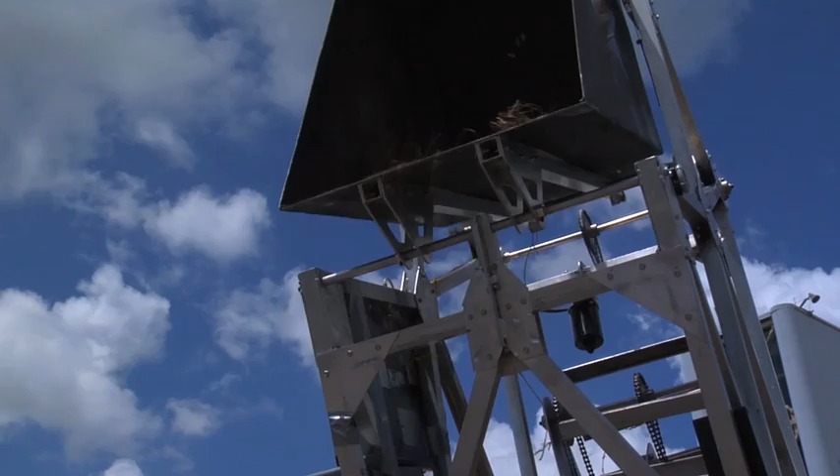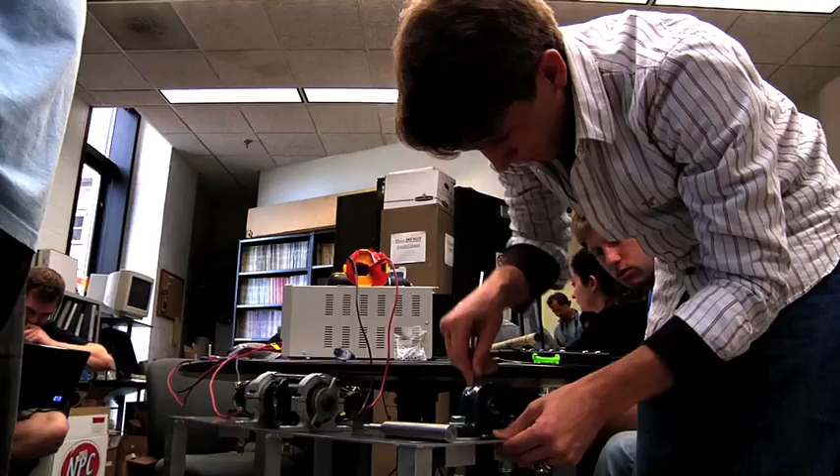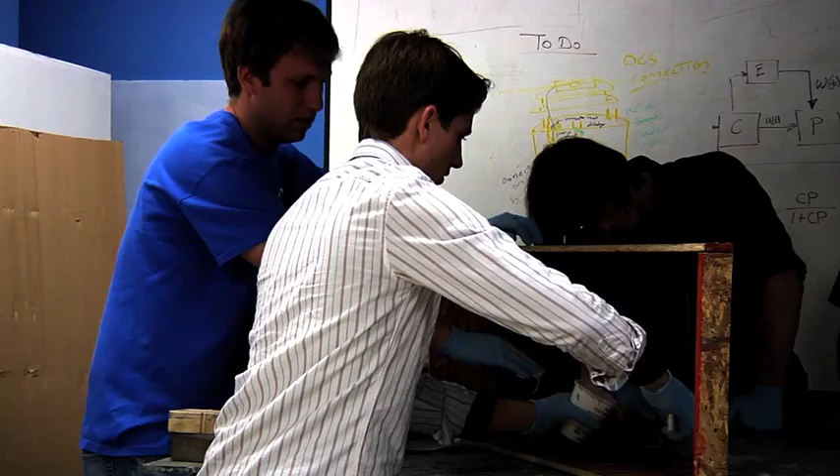As seniors, we have to do a senior design project. And as soon as we saw NASA, we thought this seems pretty interesting. It's a hands-on project, using all of the things that you've learned in the past 4 years. I think when students are challenged, they do a lot more work and have a lot more fun, and they can see that they're producing something.

In the engineering field, it's never a one-person job. You have to come together and build something. It's kind of taken me out of my comfort zone, making me learn things I wouldn't normally have to do. What I actually did in this project is take on electronics. I don't really have much electronics background, so he really made me learn a lot and try to do what I can. We're pretty far behind, got a couple more weeks to get this whole robot complete, so a lot of late nights are coming up.

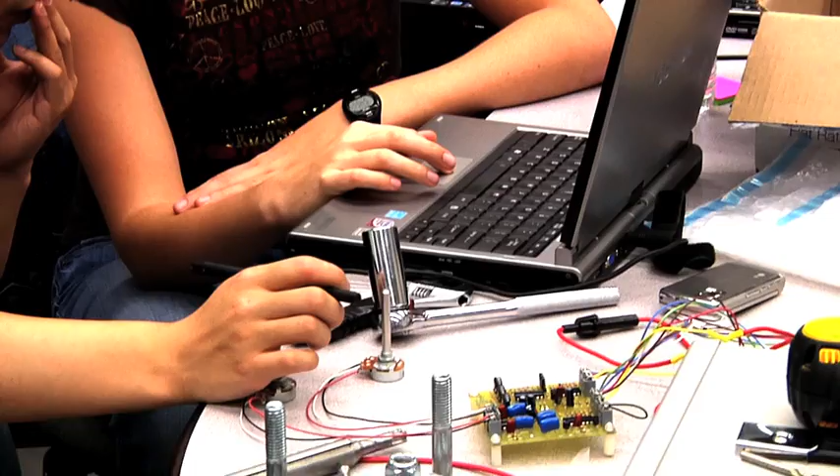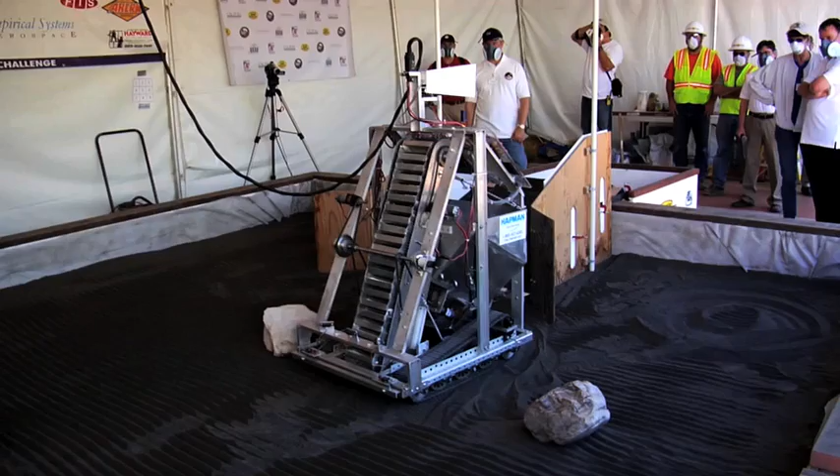We've been really focusing on the whole design process. It started with, what kind of qualities do we need in this robot? How fast can it move? How much can it hold? Are we using a joystick anymore? Could we just turn the motor off and on? We started off by looking at previous competitions to get a feel for what people were doing.

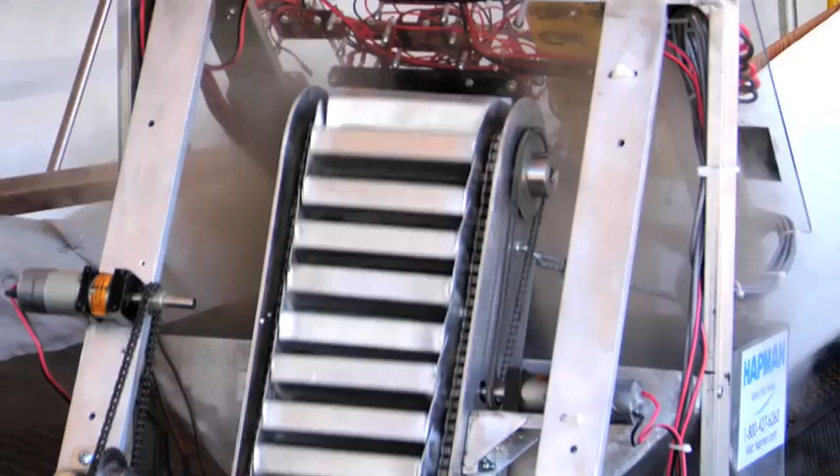We originally saw the bucket chain design, and that was sort of like the favorite, it seemed like. The bucket chain - they're a hassle, and it's a good way to lose most of the material you excavate because it just falls off. We felt like that was just copycatting, not really being innovative like NASA wants us to be with the competition. We went through a lot of different iterations, but we eventually came up with the auger.

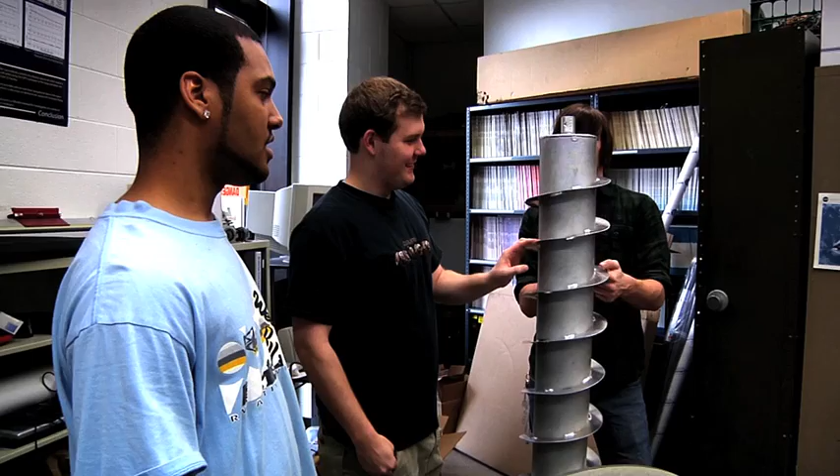It'll just drill and hopefully bring up dirt. It's a little wobbly, yes, but I think it's just going to force itself up. A lot of people tried to use augers in the past and didn't really get too much success.

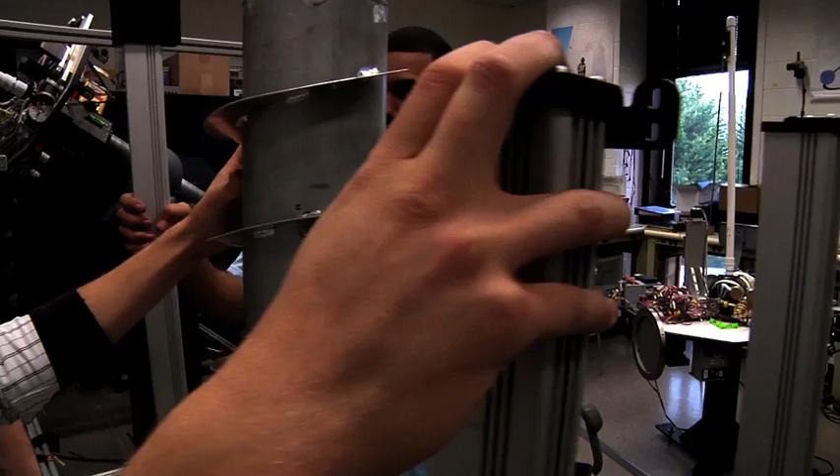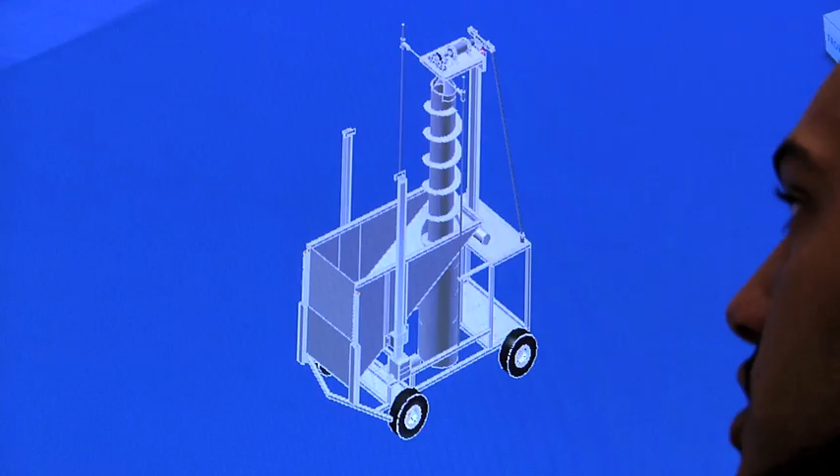You may need something on the frame to hold it up here. A lot of times I'll try to point out some obvious things to them, but you know, it's their design. So basically, this is our starting position. Once we're in the digging area, we'll stop, and then we'll lower the auger. The auger's all the way down. It's been spinning, and the dirt's been pulled up into the bucket.

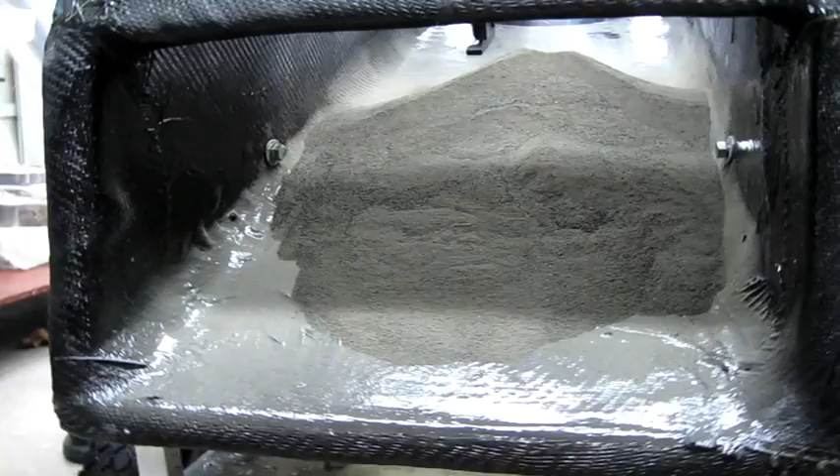That mold right there, that's going to be the outside, then we're going to put the carbon fiber on the inside. We chose carbon fiber because it's the lightest material. Originally we had aluminum, but it was a little too heavy and went over our weight restrictions.

We went through, I think, 20 different designs, something like that. It's changed a lot. The design we have now has been a revision of a design we had, like the 4th revision. We've just been throwing ideas back and forth off each other.

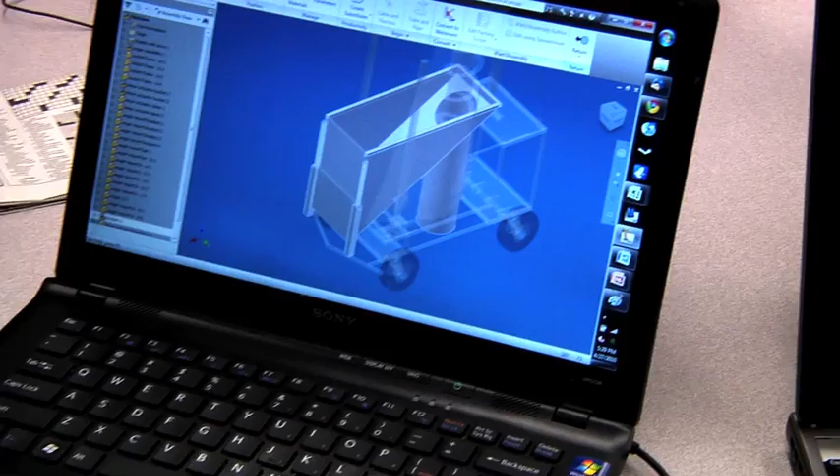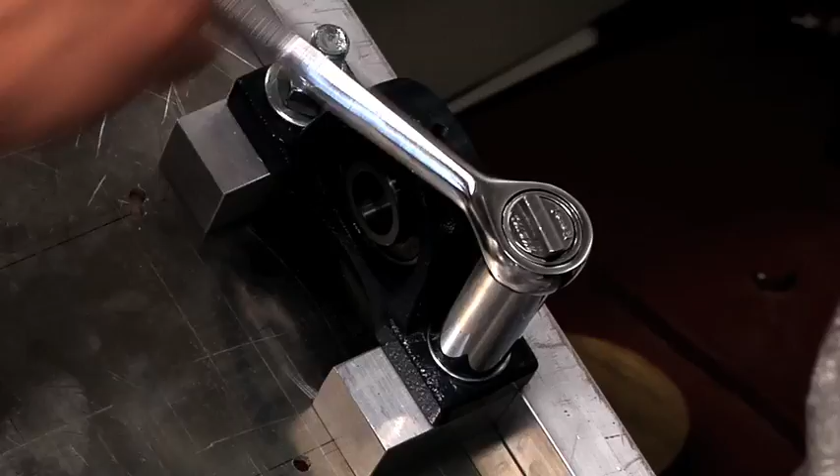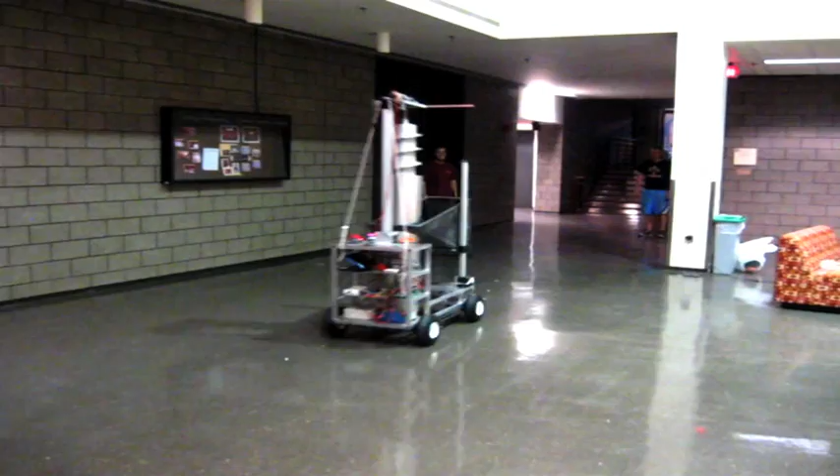Stop. I did. We're always running into problems, always having to solve the problems. Okay, how do we steer it though? I don't think that's gonna work. Stop!

Something will break down and we can't figure out the problem, so we're all down on ourselves, and then we figure out the problem and we're feeling really good again. It's a giant roller coaster of emotions. It took us, I think, like 4 months to finally get something nailed down that we could use. We have all the pieces that we need, so we're just trying to put everything together now. Things could go wrong, but we feel like we planned pretty well, and we're hoping to do pretty well.

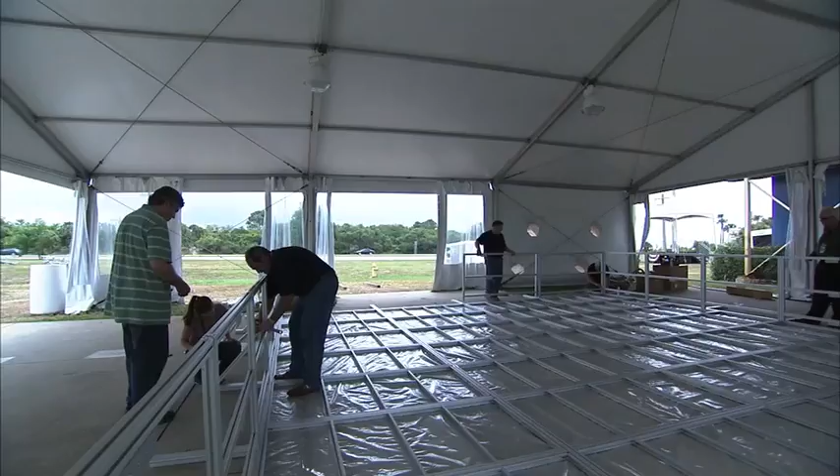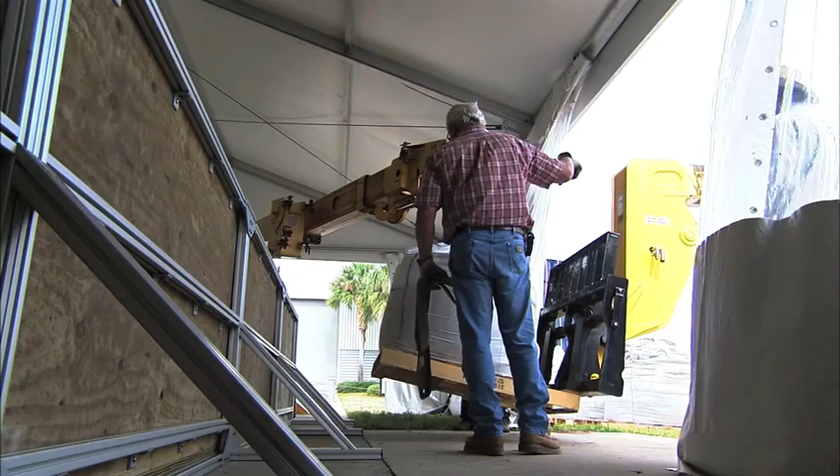It is a challenge. The frame is made from 80/20 extruded aluminum - it's called the industrial erector set. As a mechanical engineer, I was concerned that it could hold 60 tons of dirt. We did some analysis and decided that we needed some extra joining plates, some extra structure.

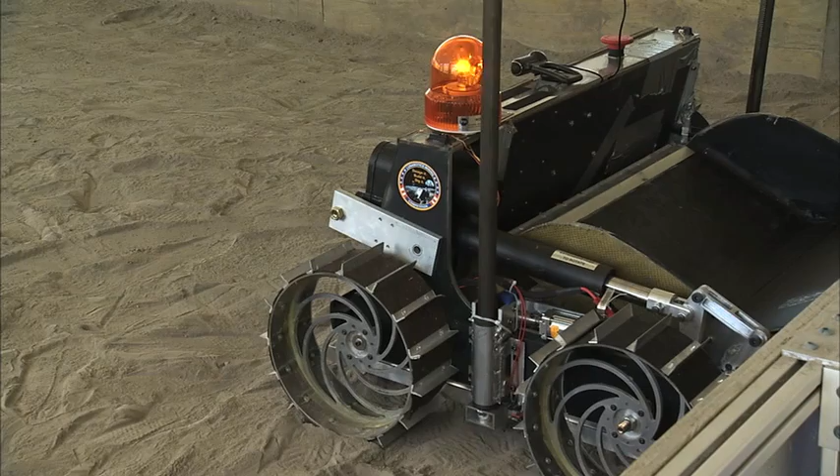We wanted the students to basically understand how tough of an environment the surface of the moon is. Lunar regolith is dry, gritty, very dusty, very fine particles that get in mechanisms. We want them to solve the problems of traversing a harsh environment, excavating really stubborn dirt that doesn't want to be excavated, and then being able to lift it and deliver it.

So that was like a moment of big relief. So we're going to make our schedule, not going to disappoint all these college teams that are on the way. Everything's so reflective.

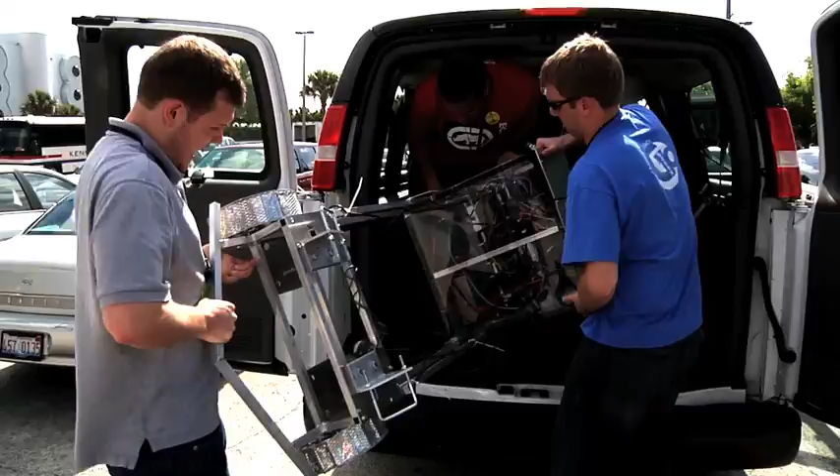We didn't go to sleep at all Sunday, so it was early Sunday morning till 12 o'clock, and then we packed up and then left at 2 o'clock.

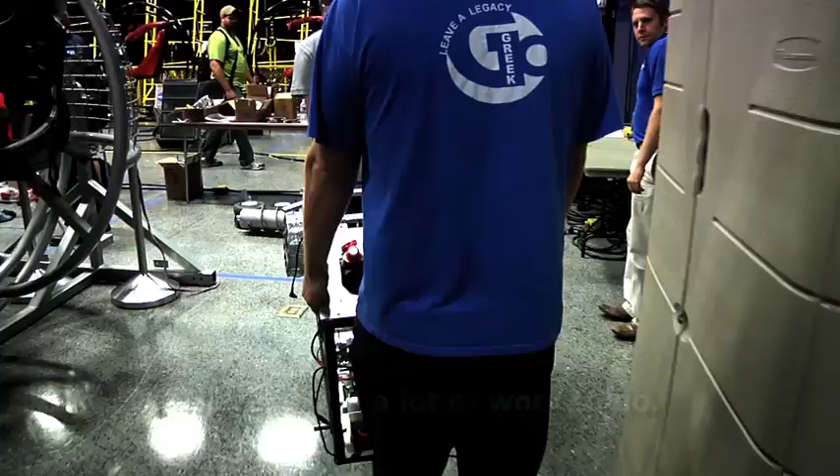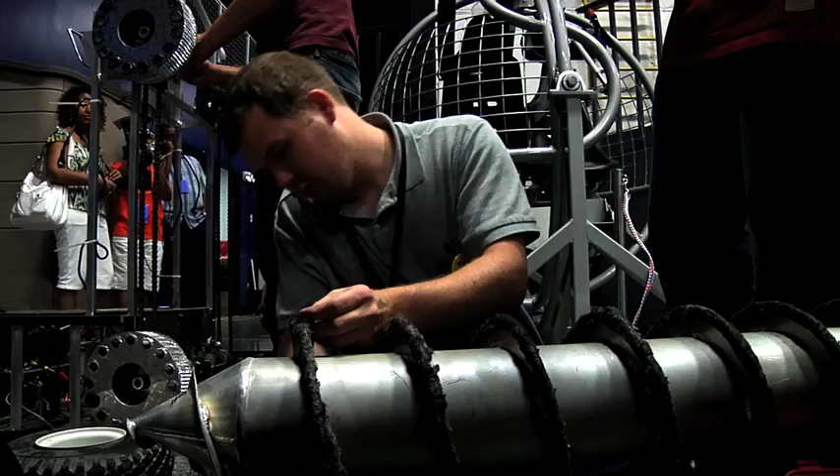It seems like every day we wake up really early, start working on the robot, and we say, okay, today we're gonna get done early, we can go out, that sort of thing. But it's robot, robot, robot. They stuck with it. They could have just slacked off, but I think they were really excited to come down here.

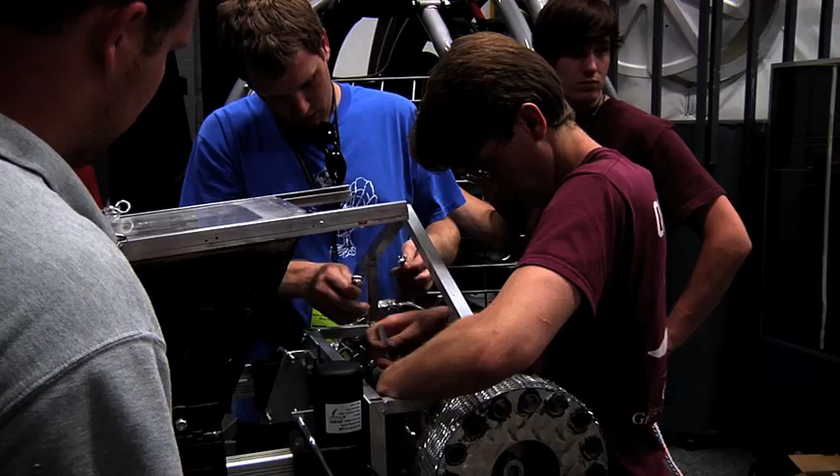We were just so focused on building the last few parts and putting it all together that we didn't really have time to test it as much as we would have liked. The last couple of weeks is definitely a big push. We knew the fundamentals worked, it's just a matter of will our program work with this, because we never actually tested it.

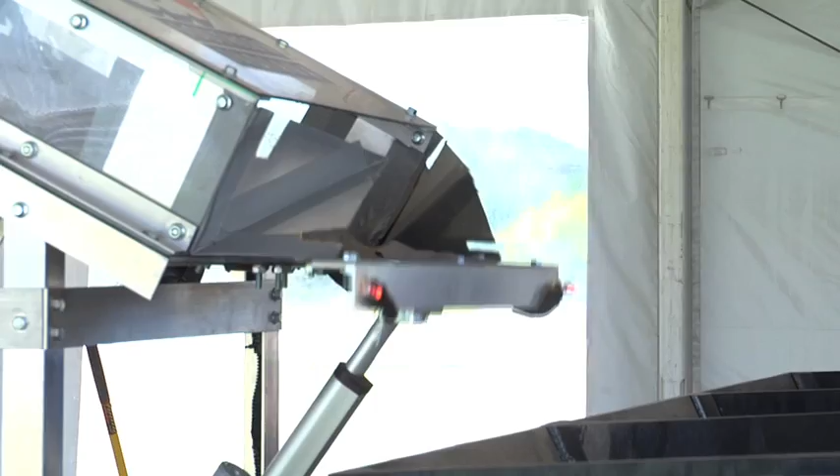The objectives of the Lunabotics mining competition, in order to win, you have to excavate lunar regolith simulant, so that's simulated lunar soil, in a large box. You have 2 competition attempts, which is 10 minutes for each attempt. And the team that scores the most points while excavating this lunar regolith simulant wins the competition.

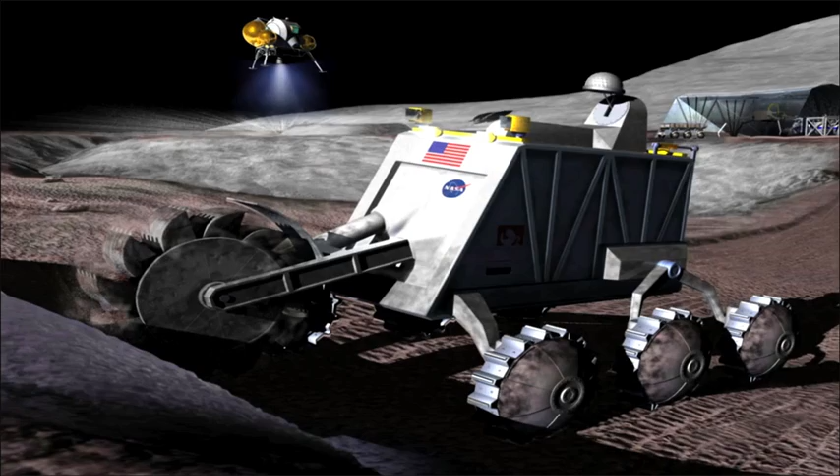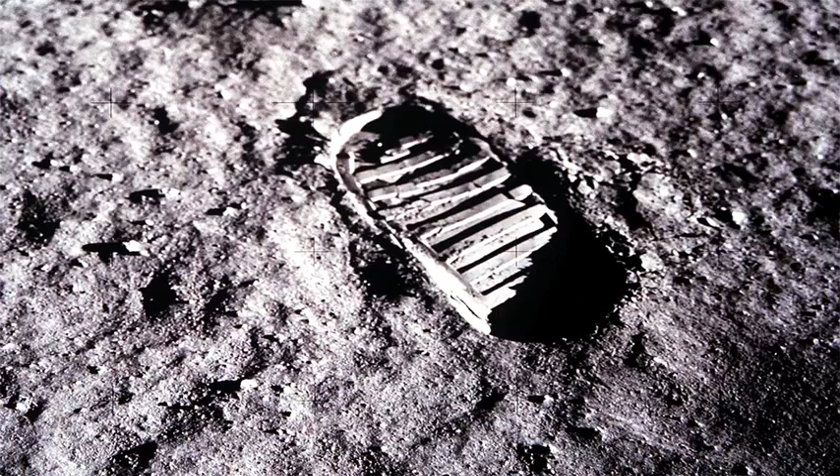We call these robots Lunabots, and a Lunabot excavates lunar soil or Mars soil, and the reason why we excavate it is because the soil contains all kinds of minerals which are valuable resources for us like oxygen or hydrogen or even water. We think there's water ice on the moon, but it's below the soil. To access the water, which is valuable for human existence and for propulsion, we need to dig down to 30 centimeters to get the ice.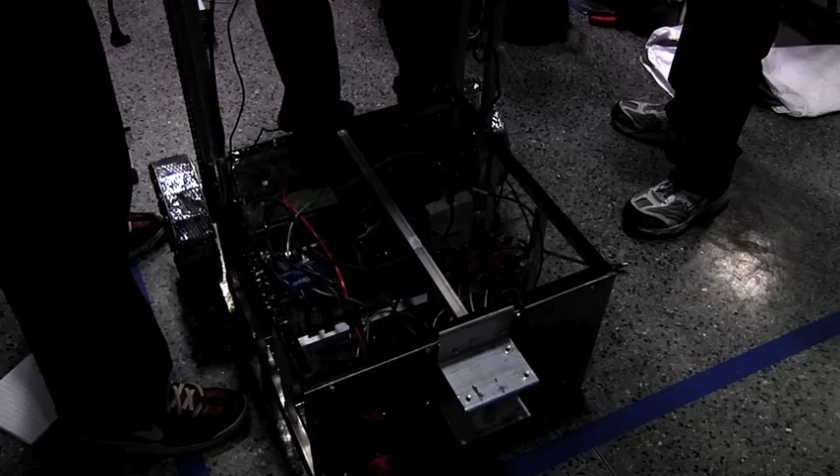Some of the people were already graduated, so they just gave up on the project. So I took over the Friday beforehand. I had about a week to actually finish off the programs, and I did what I could.

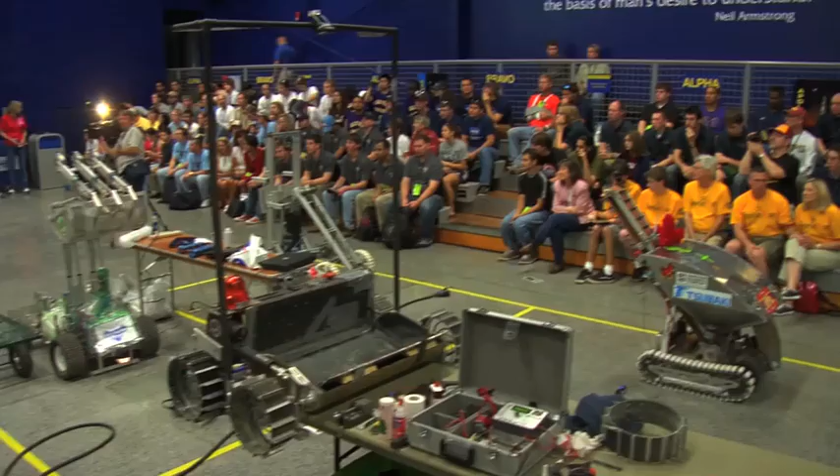Well, ladies and gentlemen, welcome to the first annual 2010 Lunabotics mining competition.

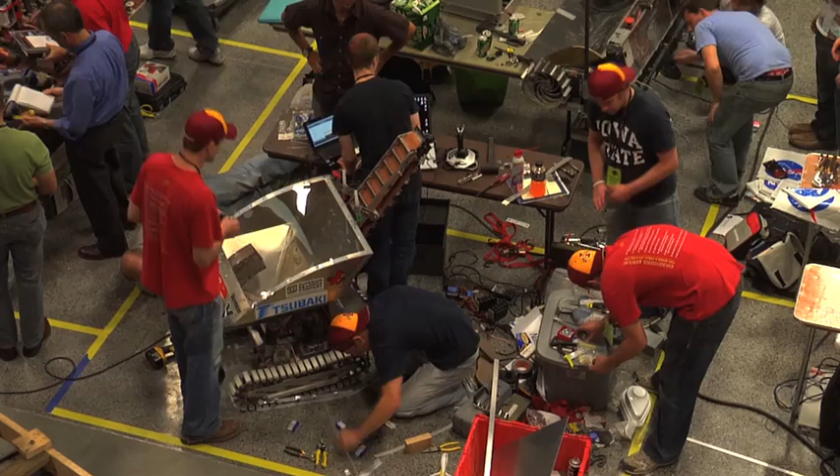Well, I'm very impressed with the students and what they bring to the Lunabotics event. It actually takes me back to when we were just getting started in the Apollo program more than 40 years ago. The competition really is an important bridge to the future of space exploration, something that we definitely need.

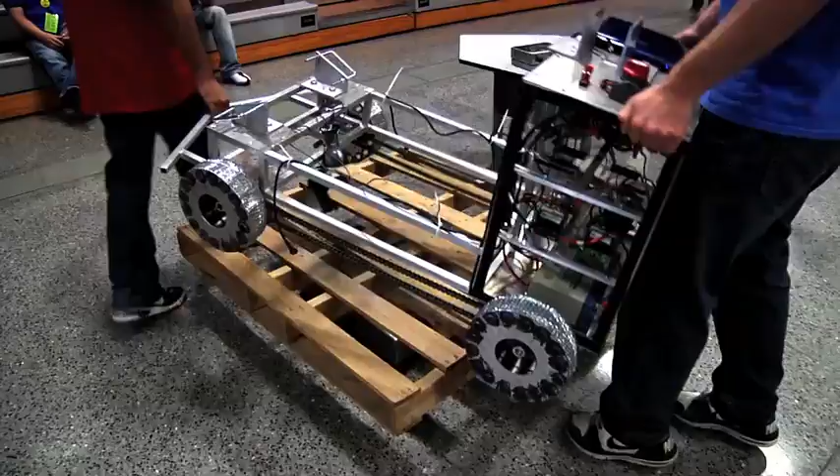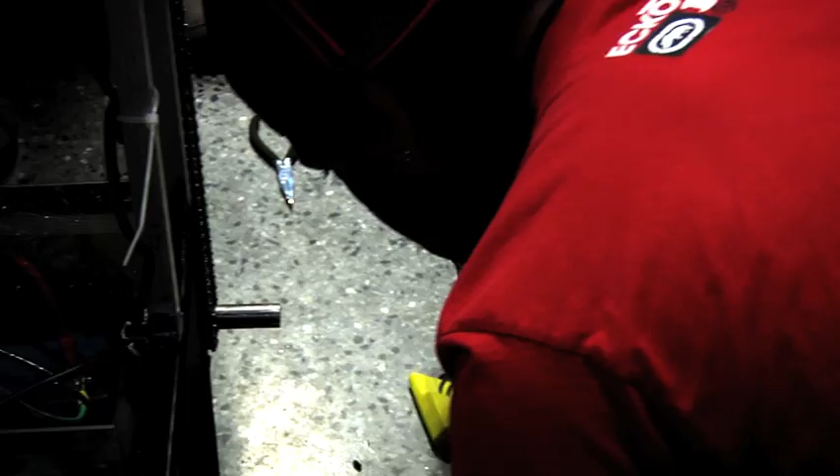First we found out we were too heavy. We were about 20 pounds overweight the first time we weighed it, so we had a lot to do after that. First, we actually changed the tires. We were able to switch out our large foam-filled wheels with some lightweight aluminum ones.

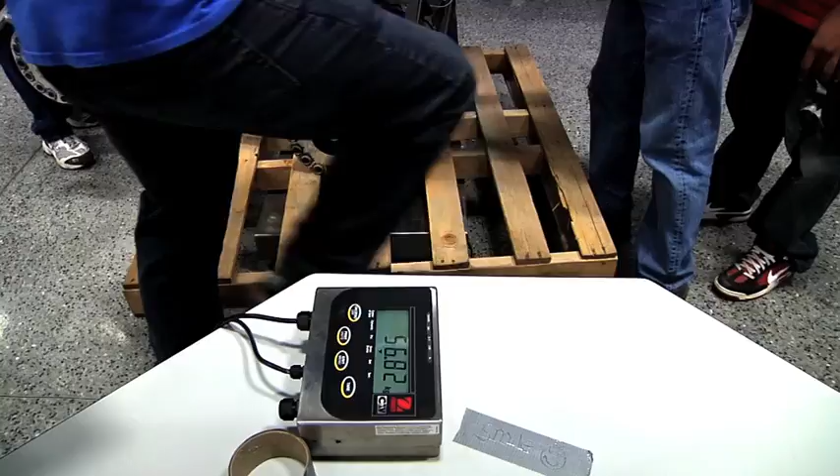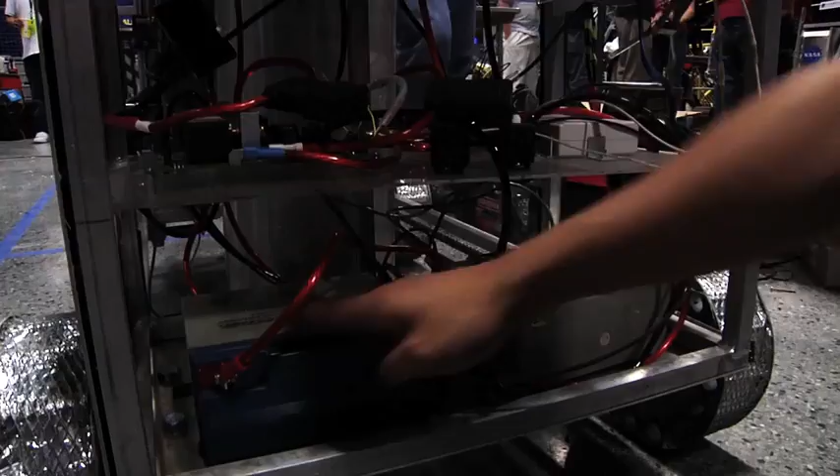Our custom-made wheels we hadn't tested, hoping for the best, and they actually ended up working, so that was great. And that saved us about 12 pounds. From there, we just started hacking away at our robot, cut some of the aluminum plates off, started cutting holes and stuff, shaving off bolts and doing whatever we could. We took some of the side panels off. That actually exposed our electronics, but that saved us another 3 or 4 pounds.

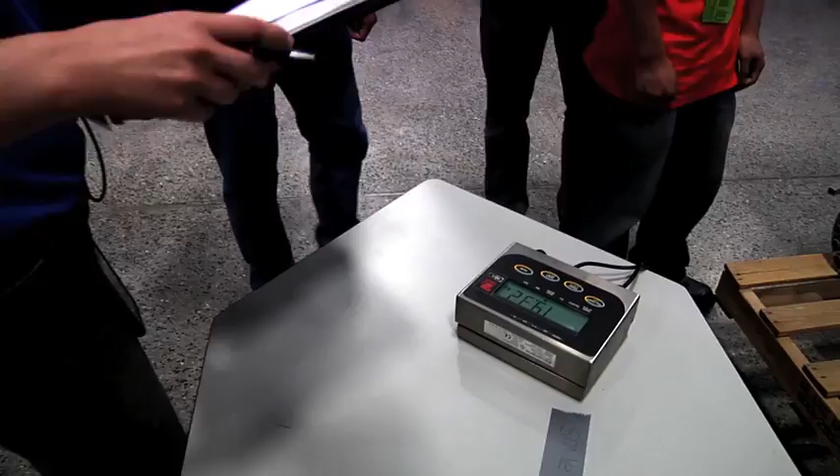Hold the pallet. All right, let's square it on it. 79.3. Well done, gentlemen, well done. And we ended up being about 0.7 kilograms underweight, so we cut it pretty close, but we made it.

The first practice session, we basically wanted to just test out some movement and sort of the auger's drilling capabilities. Keep trying to turn if you can. This is the max turn.

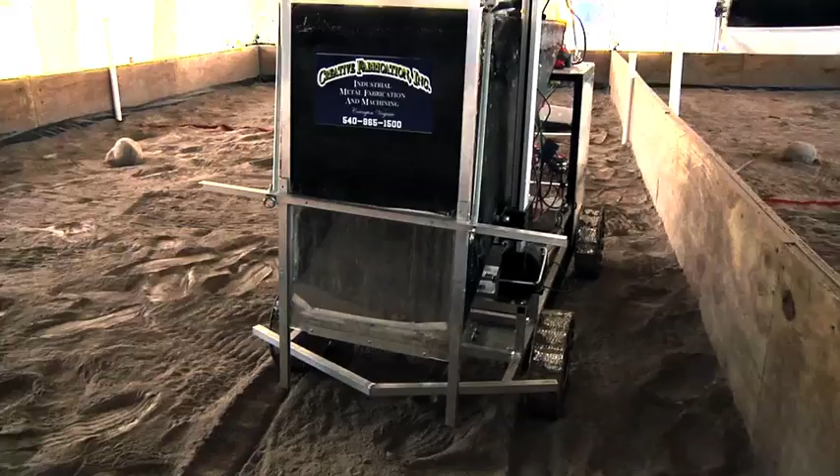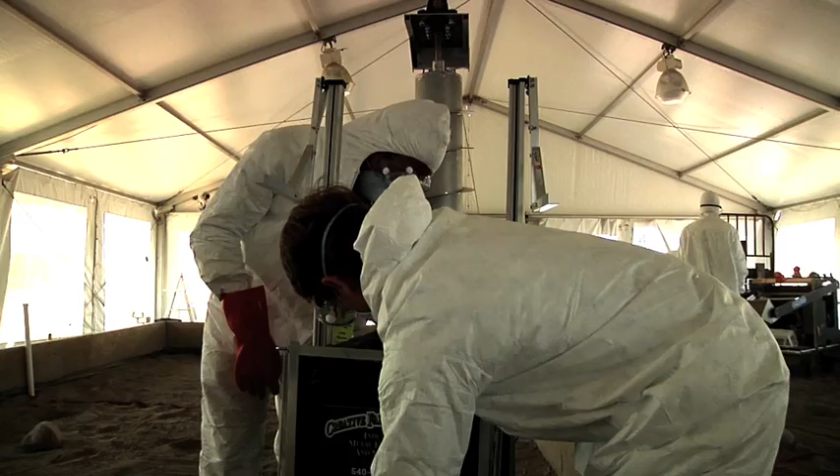We were having trouble with the maneuverability of our robot. We went into the excavation area, excavated a bunch of stuff. The engine started smoking, a few of the wires ended up falling off. I was actually kind of pleased with it because we had never really seen it excavate and actually material come up in the bucket. So we saw that, and I was like, well, it wasn't too much, but it shows the design works, and we were kind of still worried about that.

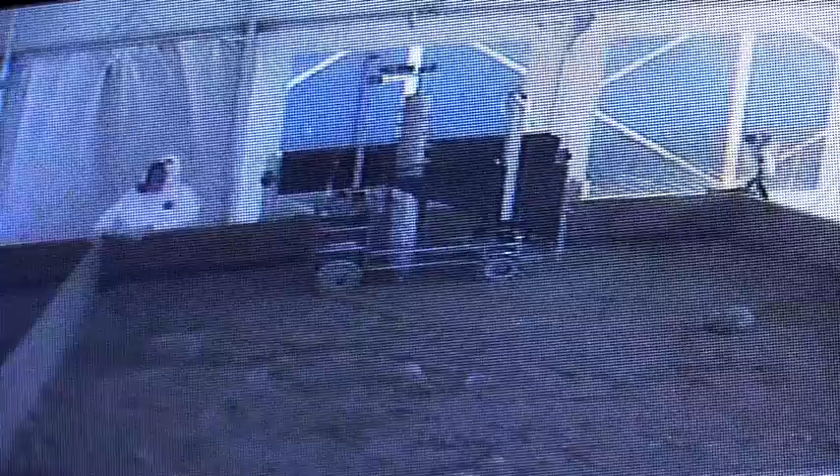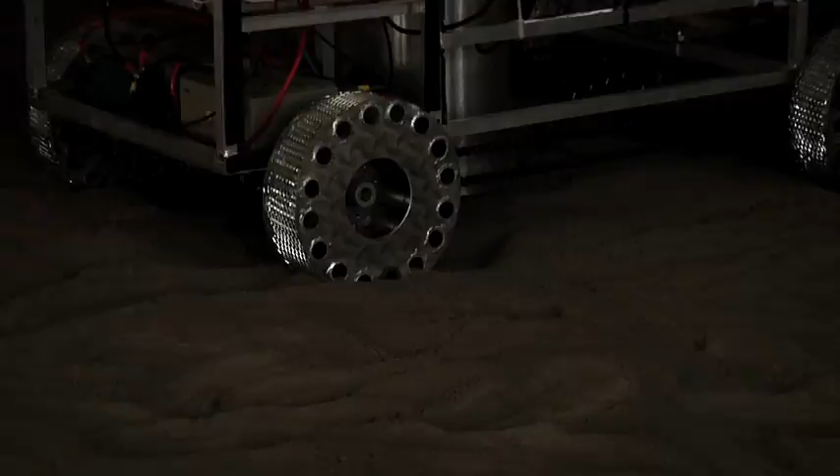Second test, we were just trying to test our mobility and just being able to turn and drive. We started the robot facing away from the digging area to practice the turning. Basically we found out that the way we had been trying to turn, which was one set of wheels moving forward, the other one moving backward, didn't really work at all because it kind of just locked both motors up.

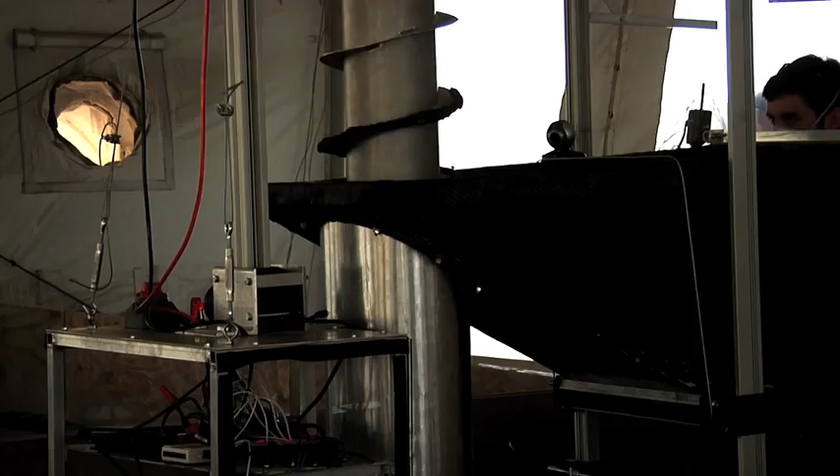Our wheels are completely limited to going straight forward and straight backward. So we ended up drilling down. We actually weren't able to get anything there either. It kind of just stopped working. The auger came out of gear and there wasn't much we could get done. That practice run, we didn't really get a whole lot done, definitely not as much as we intended to.

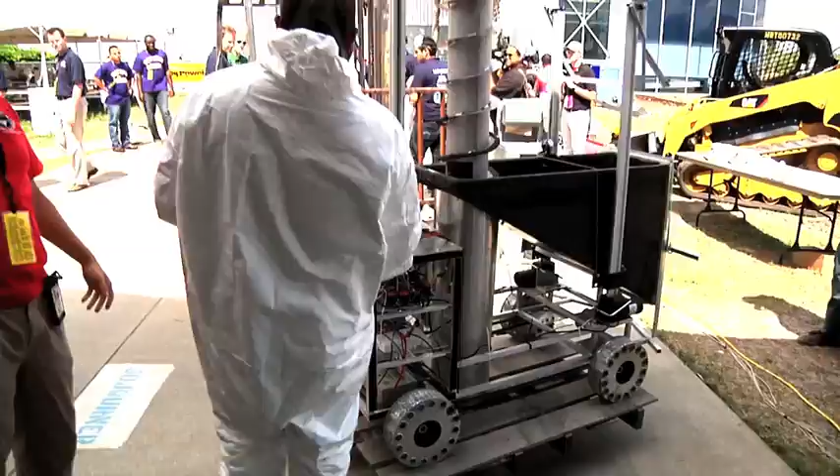We went backwards a little bit, but we did figure out how important turning was.

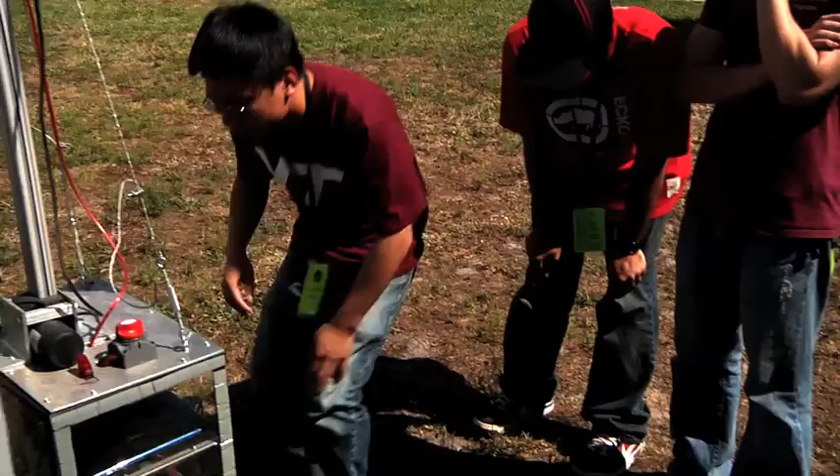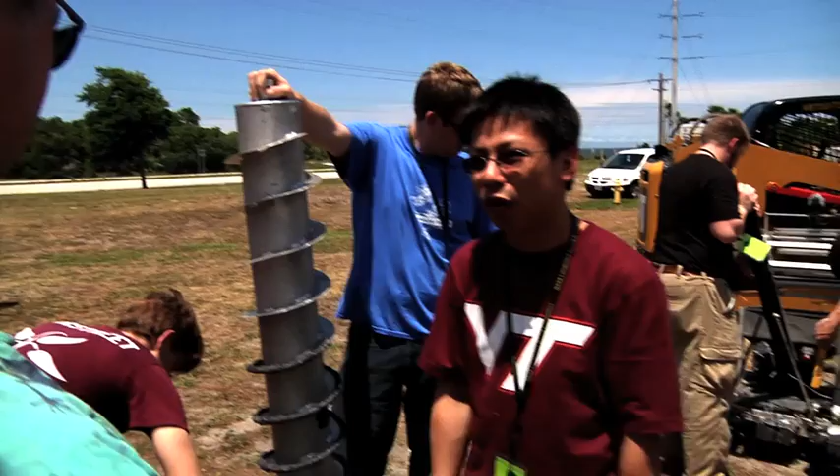It's really frustrating to learn a new programming language in a week and apply it to control a robot, and that's actually a really hard thing to do. This was all kind of dumped on him, so he's in his own panic, frustrated state, and time's ticking, so we're all just running around trying to find fixes. We were down to 3 hours beforehand, so there were a lot of pressures building up and things just starting to fall apart.

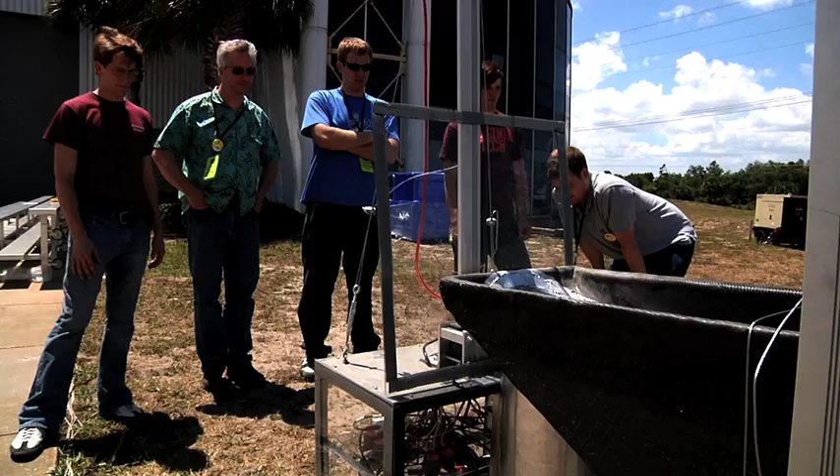None of these guys really had much electrical experience, and that was a key component for this competition. We had about 3 hours left before they were going to quarantine the robots, and we knew we needed to get the movement system down, and that was our big challenge that we still had left. Everybody was starting to get agitated by each other.

We figured it wouldn't be that hard to make a turn, and apparently it was. We were doing everything we can, changing the programming each time, trying to figure out exactly what we needed to do, and it still didn't work. We ended up just having variable speeds on each side, like the left side would go slower, the right side faster, to make a left turn. And that actually ended up working pretty well.

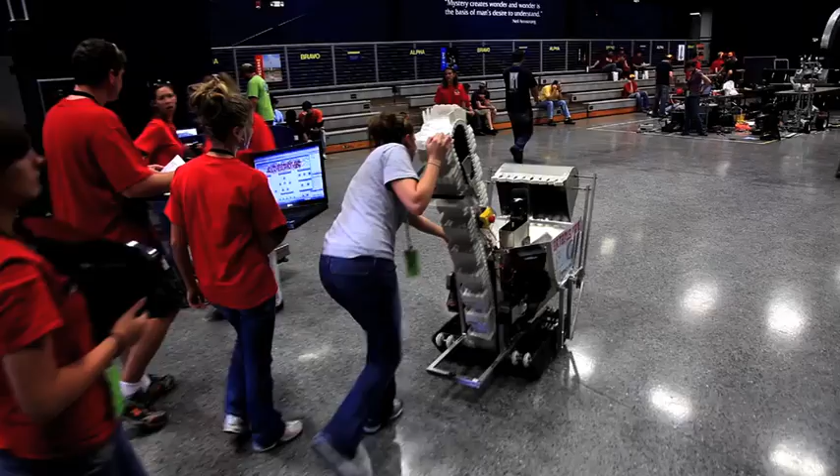We're always looking for new solutions, better solutions. So we'd like to take the out-of-the-box thinking from somebody that comes in from the outside, like these students, fresh minds, fresh thinking, and we'd like to see what they come up with. If they have some good ideas, then we would certainly like to talk to them about their ideas and possibly even incorporate those into our designs.

See what we got here. For Team A, Virginia Tech.

Oh well, it was pretty stressful. I'd say we were a little nervous. We needed to hurry and get set up real quick because we got here a little late this morning. In our practice runs, we weren't really able to do everything that we wanted to do. We thought we still might have a decent chance of being able to move around, but it was really kind of a 'we'll just see what happens' type thing.

You kind of learn that a lot of things can happen, really unexpected, and you just have to pick it up and do the best that you can.

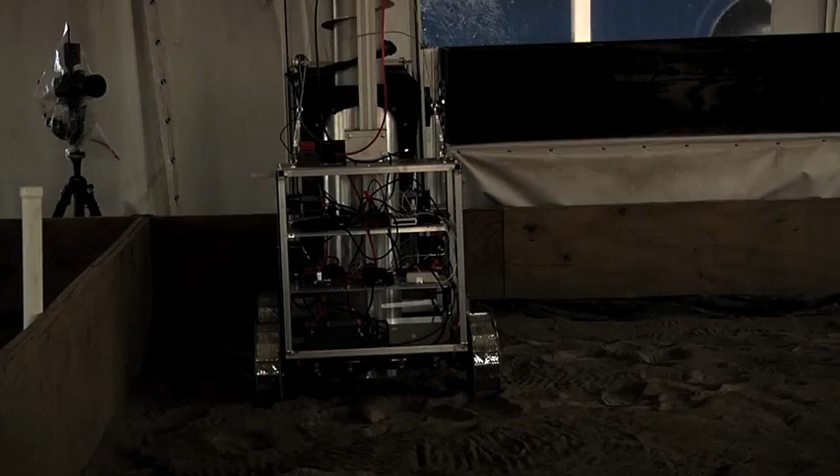We were hoping it would turn, but we realized that one side wasn't operating at all, so we were kind of sitting ducks. We were trapped in the starting area.

So we kind of were like, well, we can't move, we might as well show our design works, because that's kind of the point of this competition, is the excavation method. The maneuverability and other things, they're important, but the excavation is the purpose of this competition. So we're like, we'll just show our design works, and we started digging.

It seemed like it was pulling up the dirt even better than we kind of expected it to. You gotta go into it.

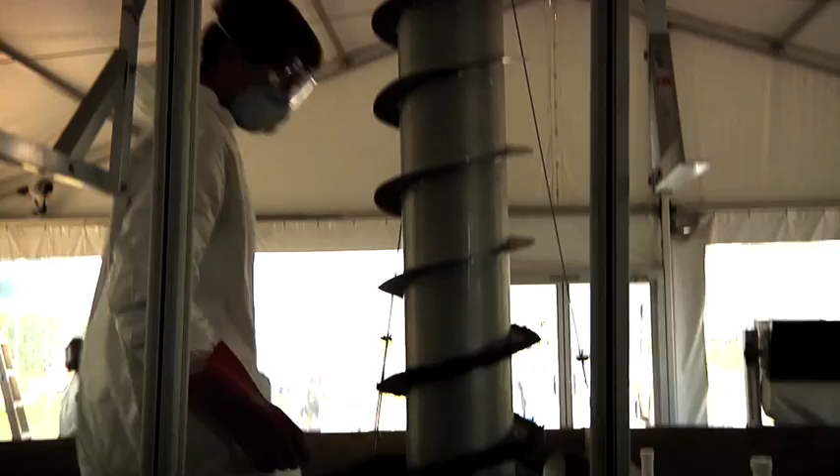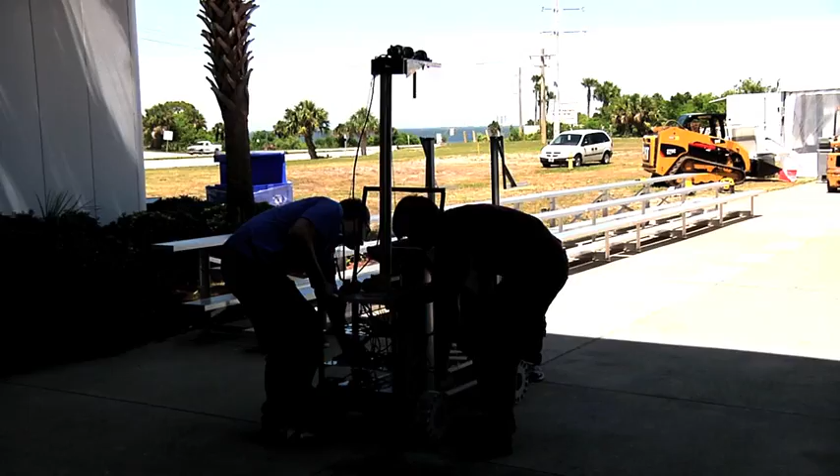We're disappointed with the results, but we're very proud of what we came up with because we know the system works. We know our tires work, our bucket works, our auger works, everything works. And we know if we had a little more time and maybe some other expertise on electronics and that sort of thing, we would have been great.

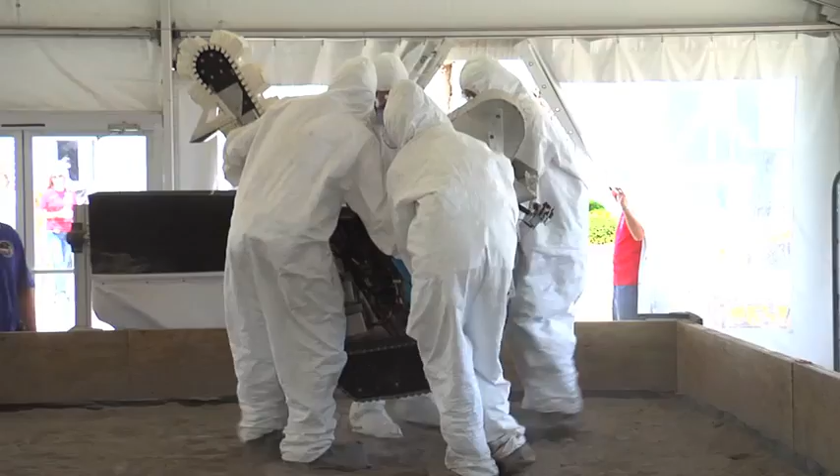It's kind of nice because it's taking a lot of stress off now. We can just sit back and enjoy all the other teams, see their designs, and actually compete, because we've been so busy since we got here. I haven't even seen but half the teams.

We did not get the result that we wanted, but it's still a really good learning experience. I mean, there are a lot of engineering groups that are just writing papers. It's been really helpful. It's been really real life.

For next year's team, definitely they need to have one or two electrical and CS workers. The more minds from different fields, the better you're going to be. NASA talked to us last night about how they never can get enough testing done. You can never over-test, and that's definitely the case.

Do a lot of practice just driving the robot around. Test a lot, allocate more time on testing, and things would actually work out really well.

We know that the excavation method itself would have been great. We just really hope that somebody actually takes the auger design and goes forward with it because it worked great for us. Just the fact that things did start to come together made us kind of proud of our design.